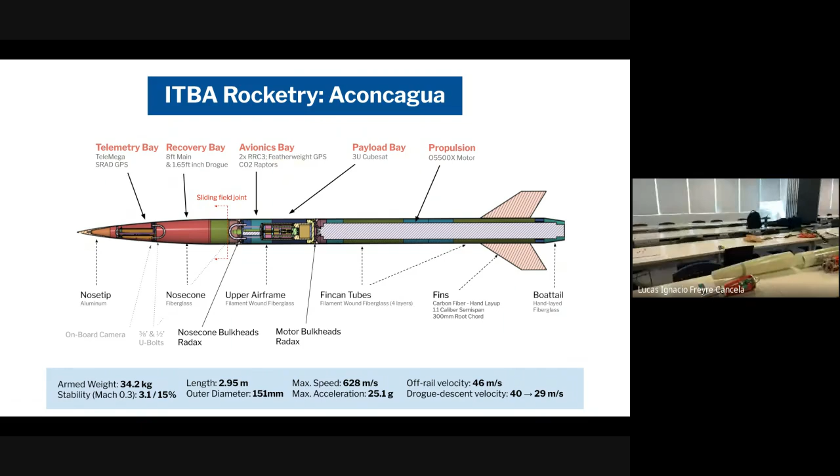We have 2 fin cans that are joined by an internal and an external layer of fiber, glass fiber on the inner side and carbon fiber on the outer side. And then we have the fins and the centering. The fins are still to be cut from this carbon plate we manufactured ourselves and are going to be joined to the fuselage through these aluminum mounting devices. So let's move on with the detailed revision of every subsystem, starting by the forward end. Next slide, please.

So you can see there the general structure. We're going to start off with the nose cone, the nose cone avionics. Great. So first we'll go Ivan and Tomas.

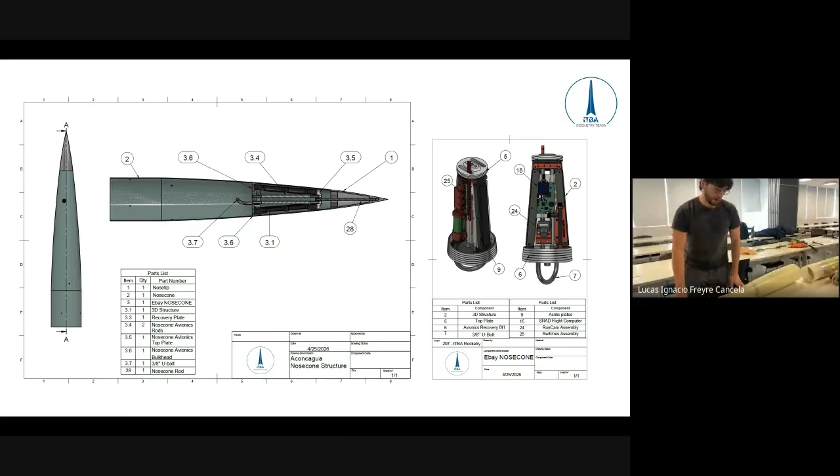So, as Lucas said, this year we were going to have 2 bays. This one is to have telemetry, so we want to receive data out of this one. And talking about the structure, we have a positioning ring where we can bolt this plate to it so that it gets fixed. And talking about the electronics, we have several boards that are in charge of data acquisition and telemetry. COTS board is a Telemega 5th version board.

This one acquires GPS position, altitude, velocity, acceleration, and sends the data with this antenna to our ground station. We also have our own SRAD boards. This one has the same capabilities as a Telemega, but it's not in charge of charges deployment. It's just for data acquisition and telemetry.

And on the other plate, we have a mounted live camera. It's not populated because we are working on it, but you can see the structure. Here should be the FPV camera. Great, and you can see it on the screen in the presentation. On the top right, you can see the assembly out of the CAD files.

Can you hear it properly? Yeah. Great. Can I see more closely the nose tip and the avionics? Yes, of course. Okay, and the hard point. Can you tell me more about the material of the hard point of the parachute, the U-bolt?

Okay, so this is a steel U-bolt. It's a 3/8 inch by 1.5 diameter. The load path in this case doesn't travel through the 3D printed structure, but instead we have kind of a fail-safe mechanism. As tension travels through here, it goes to the two posts of the U-bolt, and then in a first instance, the load is transferred. If you can see inside the nose cone, we have an epoxy joint glue.

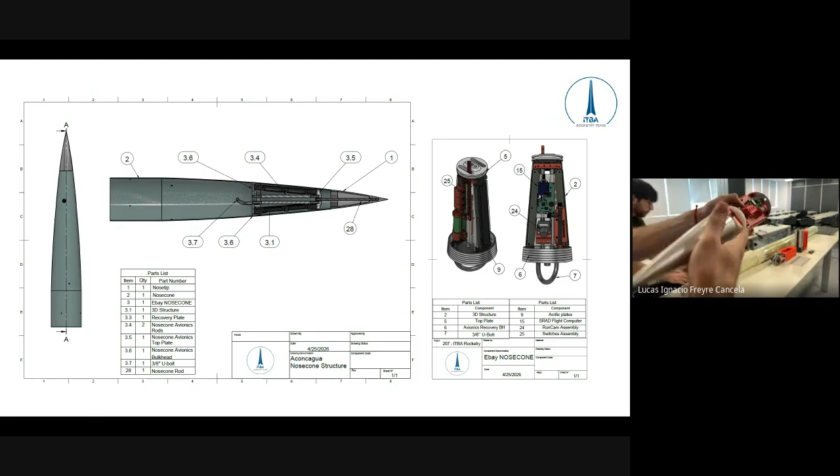Okay, perfect. Oh, and we've got another detail. The nose cone can be unscrewed so that we can recover data through these holes, which will house a USB plug, so we can do a quick data gathering after the flight. Okay, perfect. Great.

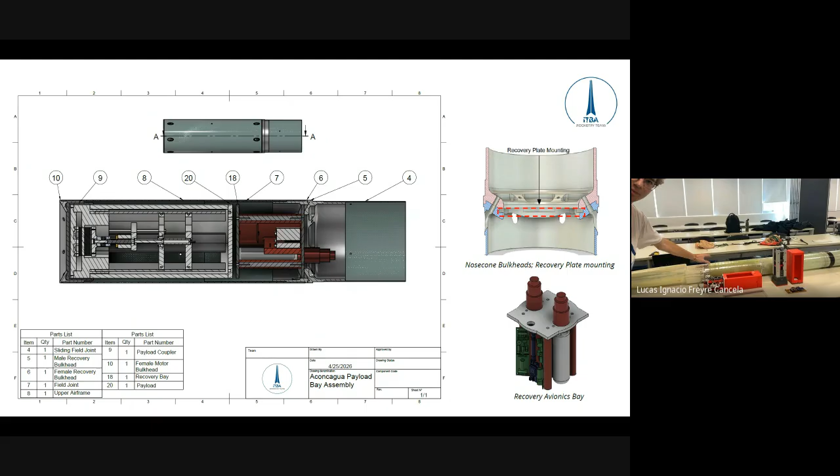So moving aft, here you can see the upper airframe. There it is. So doing a quick presentation of the upper airframe. We have the bulkheads. We have a pair of bulkheads that join the nose cone with the upper airframe. The sliding field joint gets inserted into the nose cone and is fixed during flight through 4 shear pins that are cut at apogee.

And then inside of the upper airframe, we've got the recovery bay and the payload that will be presented now again by Ivan and Tomas, and then by Marco, the payload. So please.

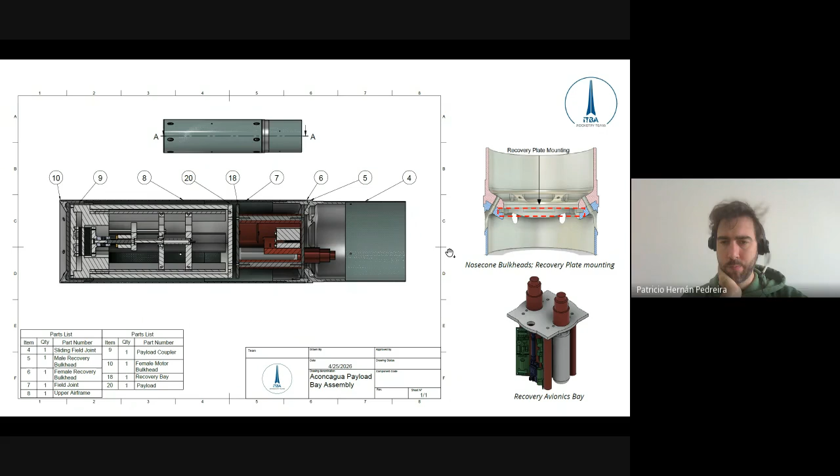I think we lost you guys. There is bad connection. Hi guys, we can see you from the second camera, but we can't hear you. Yeah, I can hear you too. Yeah, let's see if they realize. Hey. Are you able to hear us now? Hello. Okay, we will continue with the audio from this computer, and continue showing the rocket on the phone, if that's okay.

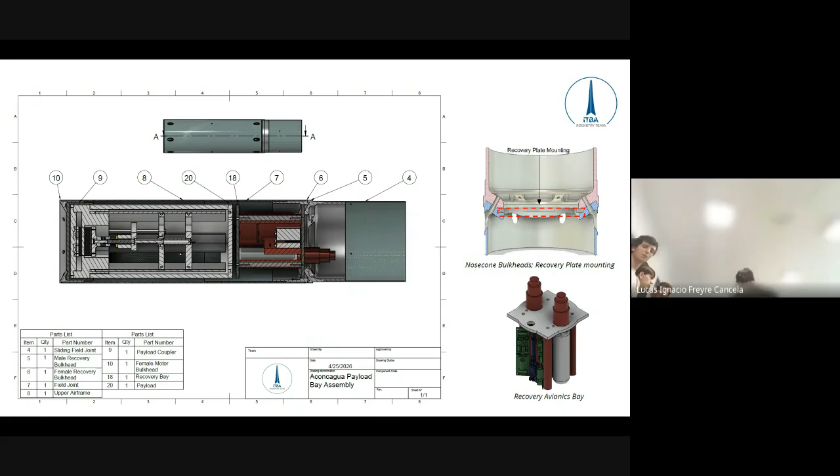So, Ivan and Tomas, can you tell us how the recovery bay is turned on? Okay. So these RRC3 have their own cables, these Molex connectors.

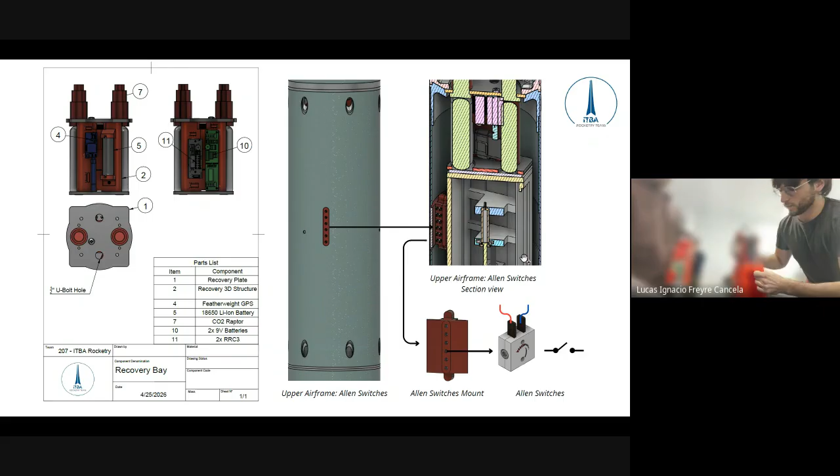So you can see in the image that is showing on the computer, these boards have their own redundant systems, and the connections are through these connectors. These Molex connectors are the female version of it. So we have the male connected to the switches that are downwards, fixed to the fuselage.

Okay, guys, before we continue, can you remove the background filter, because then I can see. Yes. Oh, yeah, that's it. Great.

So yeah, you can see in the right images what Tommy just described, the switches that are glued to the upper airframe and contain the Allen switches, as can be seen where I'm pointing at with the mouse.

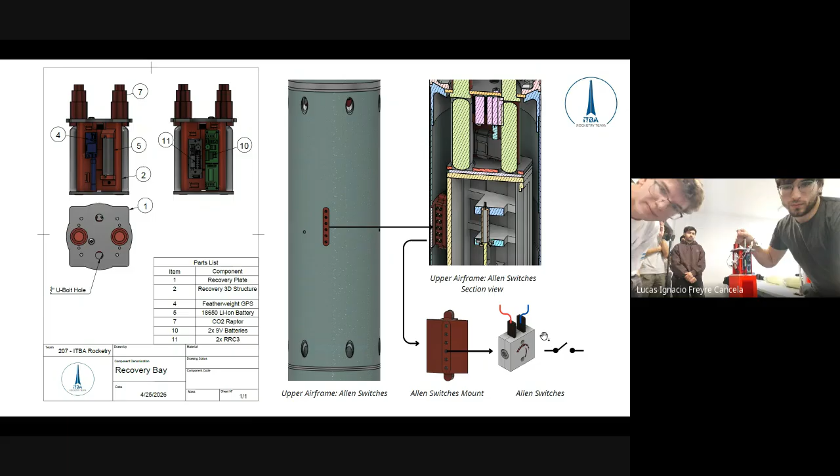Okay. So the procedure will be grabbing the connector that is on the switches, connected to this bay, fix the connection, and attach it to ensure that in all the flight it is not moved. And that's it. Then you can mount the bay. Great.

Yes. Okay, this is the other one. I will proceed to show you the recovery load path for the U-bolt when deployment occurs. So, as you can see, we have this plate right here with a 1/2-inch U-bolt, which we have FEM validated. So this sandwiches between the two bulkheads that you can see. Probably. Yeah. Yep.

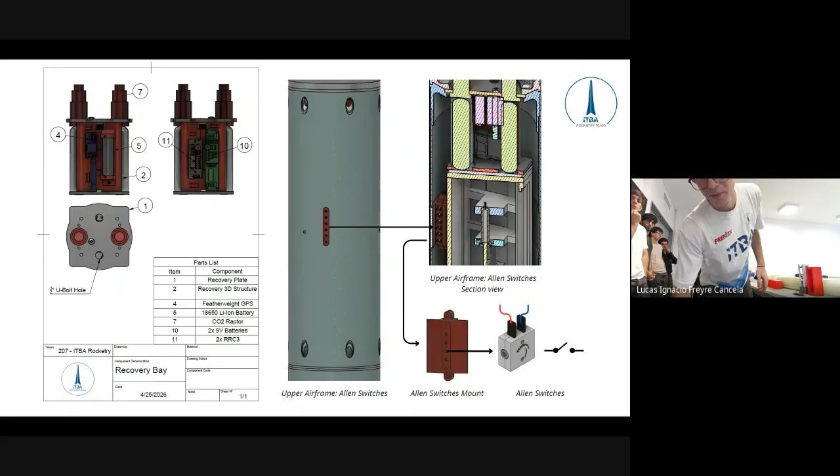So you can see our bulkhead right there. That's 2 halves of the radial joint, and we have a gap for the plate here. I don't know if you can see it because my finger is quite tight. We can disassemble it if you want to see it further, Walter. We have a section view also to show you how the plate is sandwiched. This one on the top right image. Okay, the recovery plate mounting. This one. Okay.

And this is also a section view of the radial joints. So you can see how the bolts can be inserted at an angle. Okay. How many bolts and which size do you choose for this mechanical ensemble? Yeah, we have 6 M6 bolts, and we have FEM validated this joint. Okay.

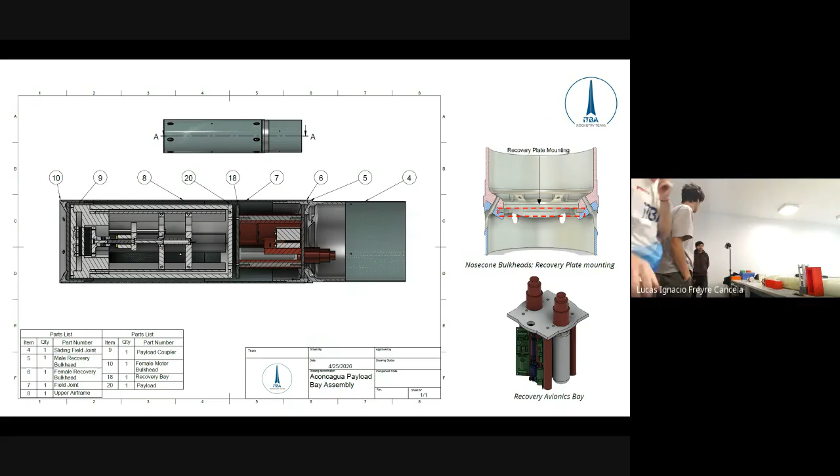Going back to the recovery load transfer with the nose cone. Oh, great. We have already. So let's move on to the line diagram. Now Santiago is going to present you the recovery gear. So I'll explain from the presentation, then I move on to the physical line diagram so we can understand it better. We have two diagrams. First, at flight, that is the first diagram presented.

Then when we detect apogee with the two redundant RRC3 computers, we trigger Raptor CO2 devices and get the decoupling of this system. We have a drogue and main parachute system. The drogue is a 1.65 feet elliptical canopy of 2.2 drag coefficient, which ensures us a 30 meters per second descent rate at the opening of the main parachute.

This drogue parachute is connected through a 10-foot Kevlar shock cord to a quick link, swivel link, and then 3-ring device system. The swivel link prevents us from entangling the shock cords, and the 3-ring device is used to assure further deployment of the main parachute. So once we reach 1,200 feet above ground level, we trigger two redundant line cutters to release the 3-ring device system.

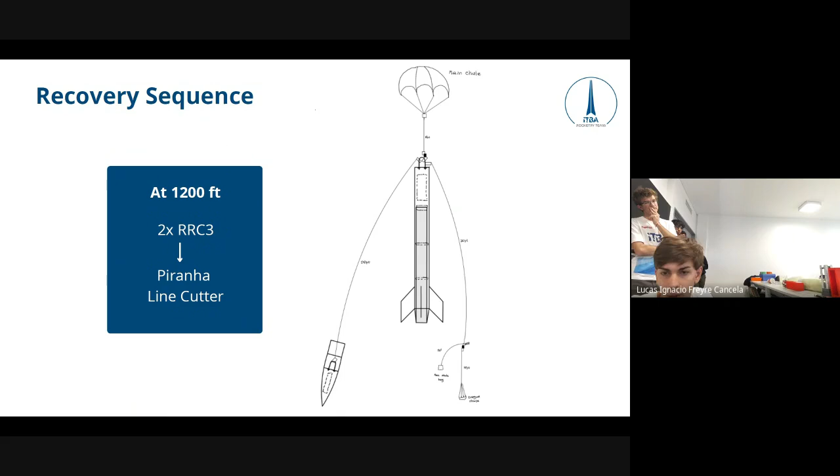This 20-foot length prevents the nose cone from hitting the rocket body's fuselage at main parachute descent. And then on the other side, we have another 20-foot shock cord, which will retain the drogue parachute and the pod and the remaining parts of the recovery sequence. So nothing gets lost at descent. We'll show you a bit of the physical line diagram.

Have you already tried this configuration in a flight, or is it a conceptual design? No, it was used the previous years, and we work very tightly with a business here in Argentina that specializes in recovery, and we came up with this diagram as an improvement of last year's version, but it's very similar. Okay, perfect. It's already been tested. I have a question about this. Could you go back to the previous slide? Yes.

So yeah. During drogue descent, the drogue will be directly above the compartment that has the main. So as the main comes out and it starts to unfurl, how do you prevent it from tangling with the drogue? Yeah, so we have been talking about this with our parachute specialist.

He assures us that when the main parachute inflates, the drogue no longer has enough airflow to stay inflated, so it falls as a separate bag next to the fuselage of the rocket body. And just to prove the concept, we're going to test it. We're going to test the complete recovery sequence via a moving car, a car with almost the velocity of the main descent. We're going to unfold the main when the drogue is open and just check that it doesn't tangle.

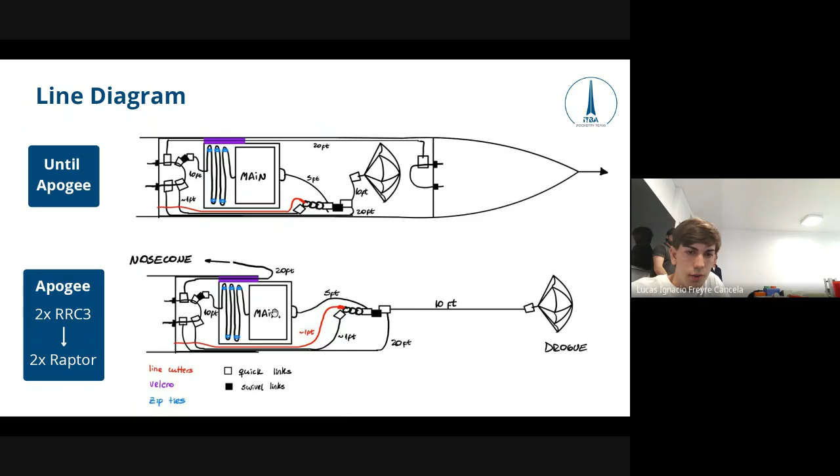Is the main in a bag or is it in a compartment? I can't tell from this diagram. It looks square. How is it prepared? Is it folded, wrapped? What are you doing with it? Yeah, so the main parachute will be kept inside the pod, a semi-cylindrical pod, which will come out when we trigger the line cutters and release the 3-ring system. So the 10-foot shock cord and the main will be kept inside a semi-cylindrical pod, and the drogue parachute will be enveloped inside a small piece of fabric.

But the pod is a bag. Yeah. Sorry, the pod is a bag. And the bag is extracted via the drogue parachute. So when we detonate the line cutter and release the 3-ring, we will cause tension upon that 5-foot line, which extracts the bag and drives the drogue parachute further than the main opening. That's why our partner with IREC, which is the one that manufactures our parachutes, said that we wouldn't have entanglement.

Is the bag connected to the top of the main, or is it only connected through that cord that I see on the right side of the diagram? It looks like it pulls it out. The one that says nose cone, or which line in the diagram? So can you just show me how the cords connect to the bag and how the main, if it connects to the bag, connects? Sometimes when you fly with bags, you attach a line which is inside the bag to the top of the canopy. I don't know if you're doing that. So could you show us the actual materials on the table there and how they'll be packed?

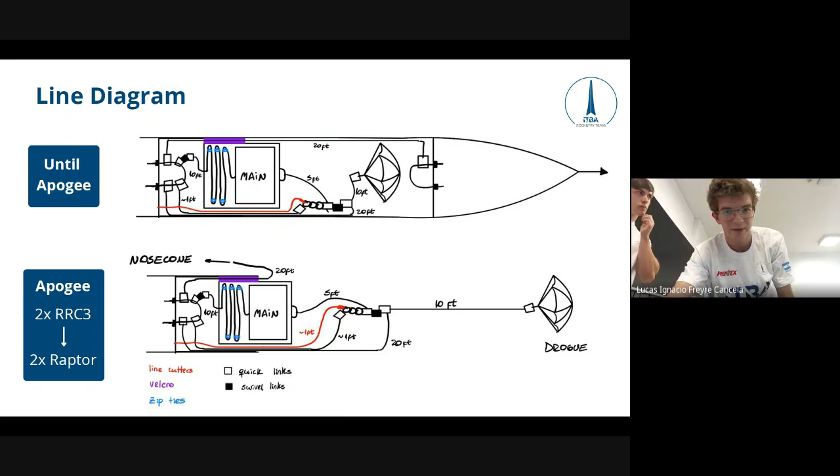Yes, currently we're expecting the main to arrive, but we can tell you that it is going to be joined from the inside. The pod is connected to the top of the parachute through a line. Yes, we are doing that. We just can't show it to you yet because we're waiting on the arrival of the parachute. But if you want, next week we can show it to you. It is going to be connected through an internal cord.

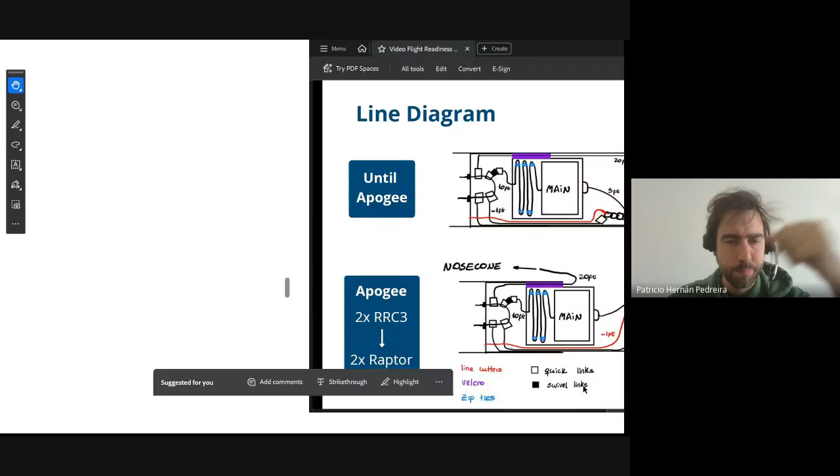Sorry, I think the guys forgot to mention this, but on the table is what we have from, I believe, last year's rocket, because we haven't received the parachutes for this year yet. So on the table is the system from last year, which is, as Lucas explained, very similar to what they are going to use this year. Just that small comment. Okay. Yes, thank you. Could you go to the next slide? Yes.

So in this diagram, where is the bag? The bag has actually already been extracted and is connected through this 20-foot shock cord and its 5-foot shock cord. Okay, so the bag is the small square where the cursor was. I just noticed this image contradicts what I just told you, but it's waiting to be refreshed. We have another version of this drawing we have yet to insert, but the main chute bag would be linked to this end of the parachute.

Okay. So that cord, which you show with the drogue hanging down, will actually be above the main, right? Because the bag is above the main too, right? Yeah, at first, yes. Do you need to update the diagram and send us the final configuration, because we need to review that? Yes. The objective is to prevent you having any issues in the recovery. Yes, of course. As soon as we end the meeting, we'll send it to you.

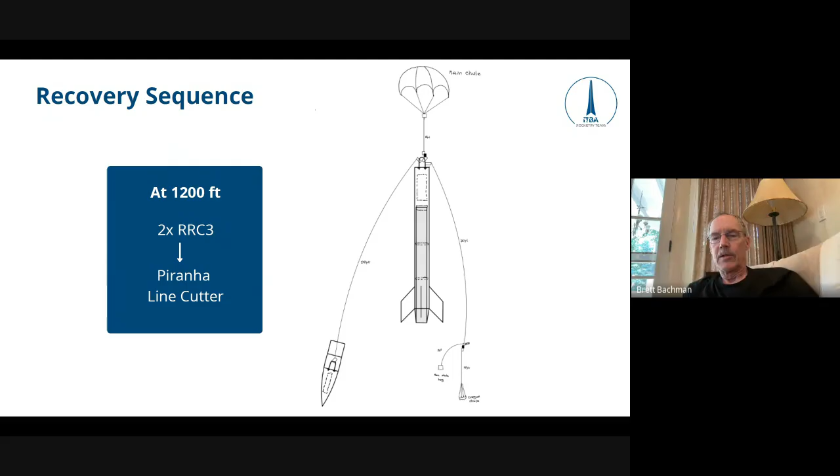The risk sometimes is the main canopy tangles in the components which are above it. So I just want to review very carefully what you propose so that we avoid potentially a partial inflation of the main. All right, perfect. So that's all for now. Thank you. Great. Thank you, Brett.

So now we're going to show you, you want to show the line diagram? We can show it when we have the final design, maybe. When the components arrive, we can show you a video of the finished recovery system. Okay? Yeah, that's fine. If you have it, you can add the recovery system packing sequence. Sorry, you both talked at the same time. I couldn't hear you.

If you have it, you can add the recovery system packing sequence. Oh, you want to see the recovery packing sequence? If you have a document that you can add or send us with the video. Yes, we do. Okay, perfect. We have arranged it with our manufacturer. We already have it, so we'll be sending it to you.

Okay. So do you have the actual drogue parachute you plan to fly with, or are you waiting for the supplier? We're waiting for it to arrive from the supplier, but it's already almost done with the manufacturer. It should arrive this week. Okay. Do you have the actual shock cord you plan to fly with, or are you waiting for that? We have everything part of the recovery gear. We have the shock cords, the swivel links, the quick links. We're just missing the parachutes and the 3-ring that is supplied by this business Aero Rigging in Argentina.

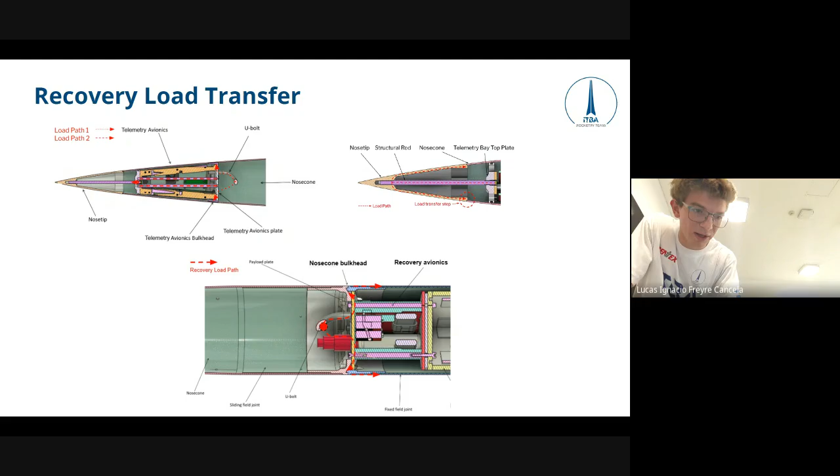I don't know, Walter, what your opinion is on this. Yeah, I usually make the same configuration that you use, but I recommend that you add a swivel in that hard point. Another swivel? Or just move it, remove the quick link and connect the swivel directly to the U-bolt, just to be clear. Yeah, something like that. Okay, well noted. Thank you. So how will you prepare the shock cords before packing? What do you do with it?

It depends, but for example, the shock cord that connects to the main parachute will be packed with shear zip ties, as I have mentioned previously, to receive some of the energy when the main parachute inflates. And then the other shock cords will just be packed with small elastic bands to get a more compact design. Yeah, so normally I recommend you Z-fold, maybe 6 inches back and forth, 6 loops, tape on either end, something like that to organize the cords.

You're probably going to do that, but many teams don't think about doing that, and it causes tangles from time to time. Okay, thank you for the recommendation. Yeah, great. Just add these details in the packing sequence, just to confirm that you have the right procedures. Okay, great. We'll also add it into the integration document.

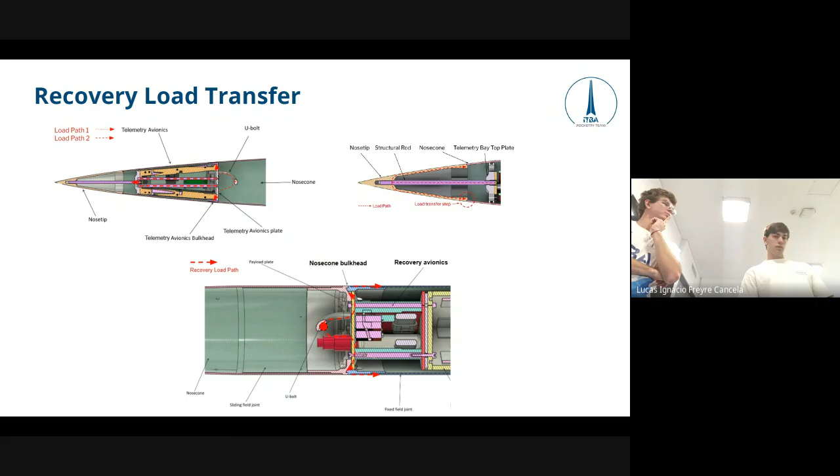Okay, perfect. And just to confirm, you use CO2 for deployment, right? Yeah, we are using Raptor CO2 deployment mechanisms. Okay, and what is the size of the cartridge? So we are currently undergoing ground testing for the pop tests, but we have calculated that we will need around 35 grams of CO2, and then we have another cartridge of 45 grams of CO2 that deploys half a second later to ensure deployment in case of a dud or any problem with the canister.

What kind of shear pins? How many? We are using 4 nylon 4-40 shear pins. How many in total? 4. 4 for each section? We only have one deployment section, so that's right. Okay, sorry, that's 4. Do you have vent holes in the recovery compartment? Yes, we do have vent holes in the recovery compartment. How many? How big? We have 4 4-millimeter holes, I believe.

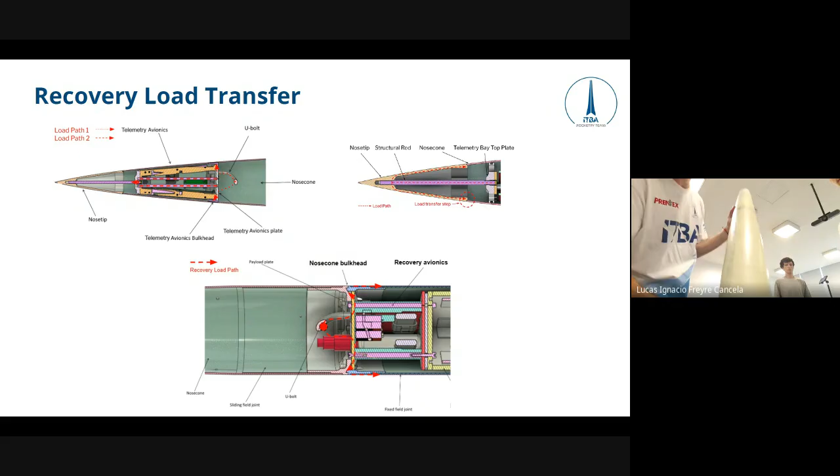Okay. And are the vent holes already in the airframe? Can you show us the holes in the airframe? Oh no. We've already made the shear pin holes, but we haven't made the pressure relief holes, but they are very similar. So we can show you the holes for the shear pins, and we can tell you that they're going to be exactly like this. But you don't already have the vent holes in the airframe. No, we're doing them this week also.

Okay. So can you explain exactly where you plan to put the vent holes? Can you show us on the airframe where they will be? Okay. So firstly, we need vent holes in the upper portion to equalize the pressure for the avionics bay telemetry, which we are looking into to see how many we need in the upper part, but that is sealed by the bulkhead from the recovery bay. So we have done all our tests with this assembled.

And then on the lower part, we were planning to add 4 holes to the recovery bay, equally apart. That would be every 90 degrees, a 4-millimeter hole toward the upper portion of the recovery bay. Yeah, it would be almost in this section of the airframe. You can use the cell phone camera to show it. Yeah, sorry. It's on this portion, near the bulkhead. You can see the bulkhead because it's kind of translucent here. So we would make them near the top, 90 degrees apart, so 4 holes. Okay.

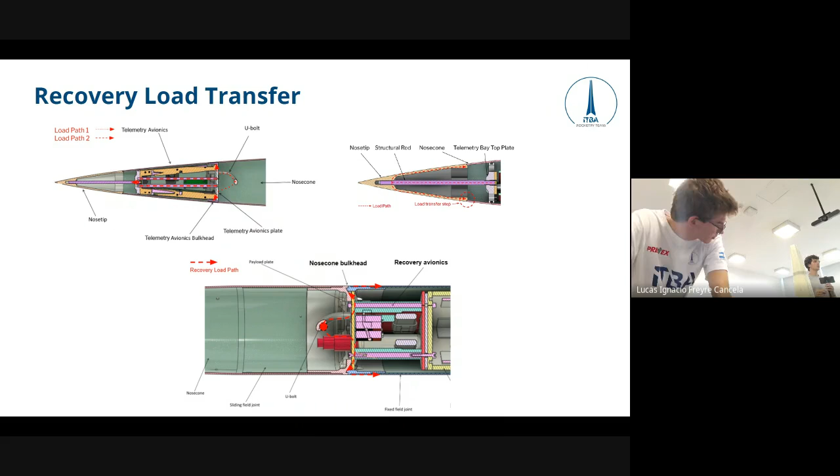What's the maximum velocity for your flight? We reach approximately Mach 1.8. Yeah, that's approximately 620 meters per second of max speed. So the vent holes for the avionics will be towards the front of the nose cone, correct? No, but not the mission critical avionics, right?

So we have talked that all of the avionics on the upper part here are SRAD avionics that are not in charge of the deployment of charges. All of the deployment is achieved by this avionics bay, which is right here in this portion of the airframe. So how far down from the shoulder of the nose cone will that compartment be approximately? The one that deploys the charges.

Yeah. So what I'm trying to ask, the vent holes for your avionics bay, it's best to keep them well out of the disturbance in airflow that comes when you go transonic and supersonic. So you want to be below the nose cone shoulders so you get out of the way of those shock waves. So I just wondered roughly where the vent holes for your avionics bay will be compared to the shoulder of the nose cone.

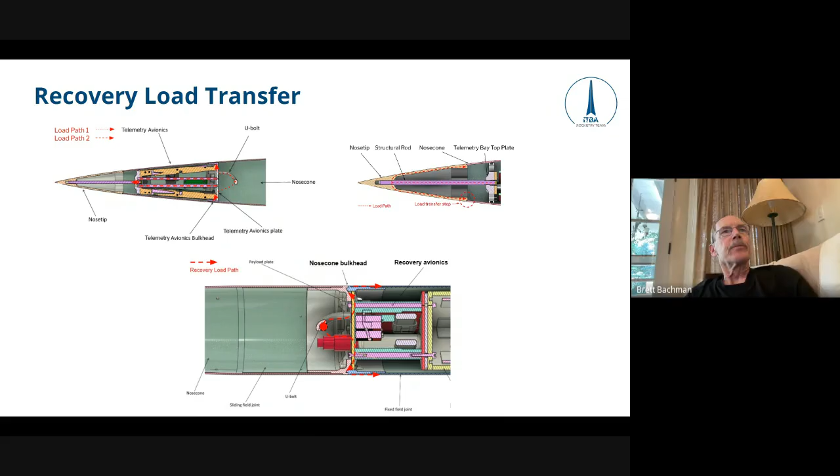Okay, yeah, so if I'm showing you this right here. Sorry, the phone. Wait, I'll go like that, whether you can understand this better. This is our nose cone, right? Here we have parachutes, and then we have the mission critical avionics housed in this region right here. So the vent holes will go right here, 90 degrees apart. Yeah. So, as low as you can, because you're kind of close to the nose cone shoulder. Okay. All right. Great. Thank you.

Great. So moving on to the payload. Marco will show you now how this works. Is that okay? Okay, so basically we're going to make a payload. It's a scientific experiment. It's a 3U CubeSat and 2 kilograms, so we can meet the requirements. We designed an infusion pump, which is a medical device used for precise delivery of flow. And it's pretty simple actually. It's mostly a linear actuator with a lead screw that pushes the syringe and then generates flow.

And what we're going to do for this experiment is measure the flow that the infusion pump creates between launch and apogee, as there have been some papers written about how not only vibrations, but high accelerations and even changes in external pressure can influence and affect the delivery of flow produced by these systems, such as creating boluses, which are sudden increments in flow rate, or air pockets, which can strongly affect the delivery of these systems.

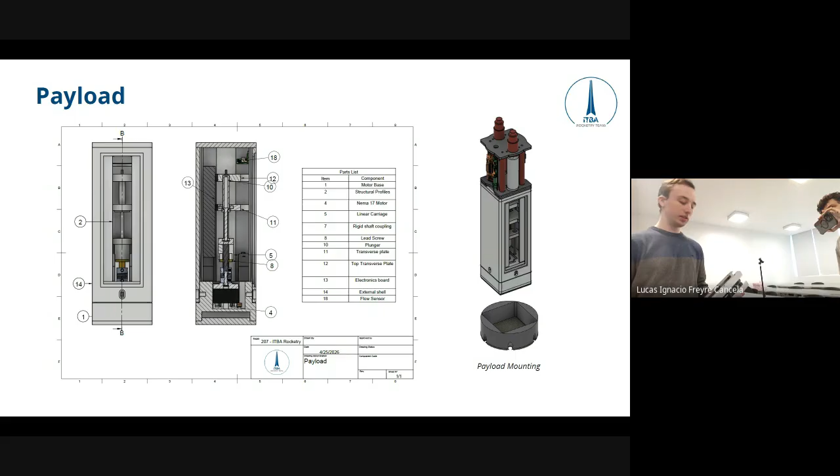Activation is given through an accelerometer that detects launch from a high acceleration and then starts the experiment. Okay, and that accelerometer is powered by a battery, right? Yes. And that battery, at which time of the assembly process is it turned on or connected with the sensors? It's turned on by the switches on the external side of the rocket. A separate one that is only for payload activation. Okay. And that payload is attached to the rocket in all the launch and recovery steps? Yep.

And what is the method that you use to attach all the system to the rocket? Okay, Felipe. So as you can see here, we have this plate that is captured by the two radial joints approximately at this height in the rocket. Then we have the avionics plate. What you can't see here is that we have 4 aluminum 6061-T6 rods that join these two plates. So this is non-structural, that's 3D printed.

And then we have another aluminum plate that is directly bolted to the top of the payload bay. The payload is housed here. And then we have a support on the bottom that acts as a rest that prevents the payload from traveling in tension. You can see the rest here in the right image of the slide. You can see the payload attached to the recovery bay, and then the payload mounting on the bottom of the payload.

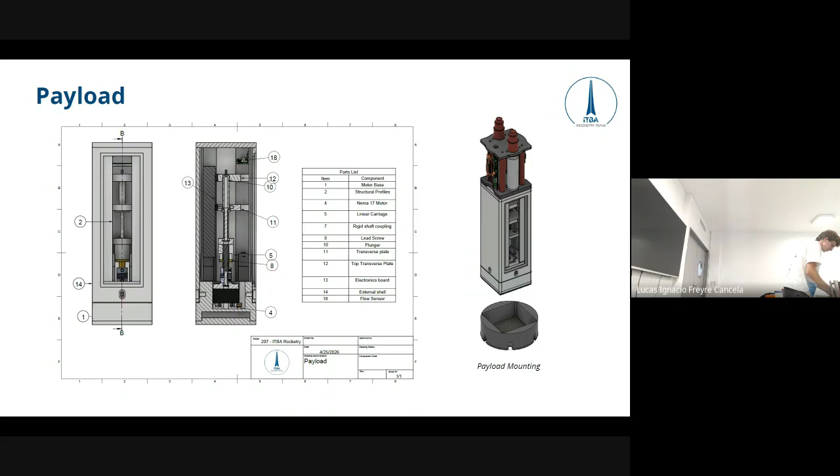Yeah. So my essential question is, is there a screw that goes through the fiberglass and which then connects to that mounting, or is it just to the aluminum of the radial ring? Just to the aluminum of the radial joint. We have the orifice here, and it stops at the radial joint. So we can separate this because we haven't glued it yet. We want to show it to you. So let me ask the rest of my question.

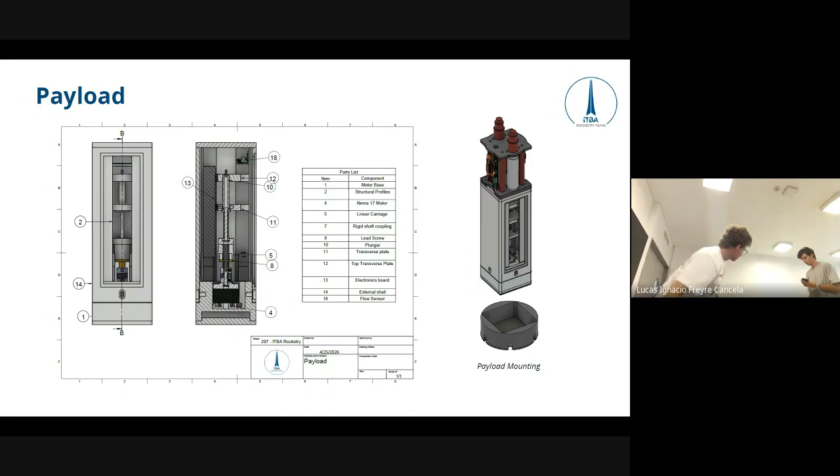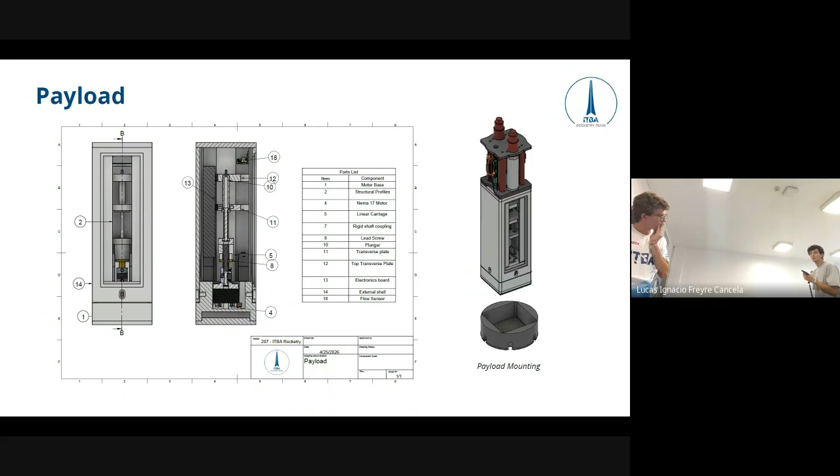So let's say that you have an unplanned separation during boost, and the rocket comes apart. This is going to flop down at Mach 1.8. Is it possible for the weight of the payload to cause the glue joint to the radial connector to fail and this comes out? No, because you mean to the nose cone bulkhead, to the top bulkhead, or to the bottom bulkhead? Either one. What will happen if you have a failure at Mach 1.8? Will it be just a glue joint, or do you have any screws? I think I didn't understand the question. You're asking if we have any additional screws that go through the fiberglass into the radial joint, or if it's just glue joints for the airframe, not the payload. Well, for the latter question, I think you said it's just the glue that holds this in, right? Yeah.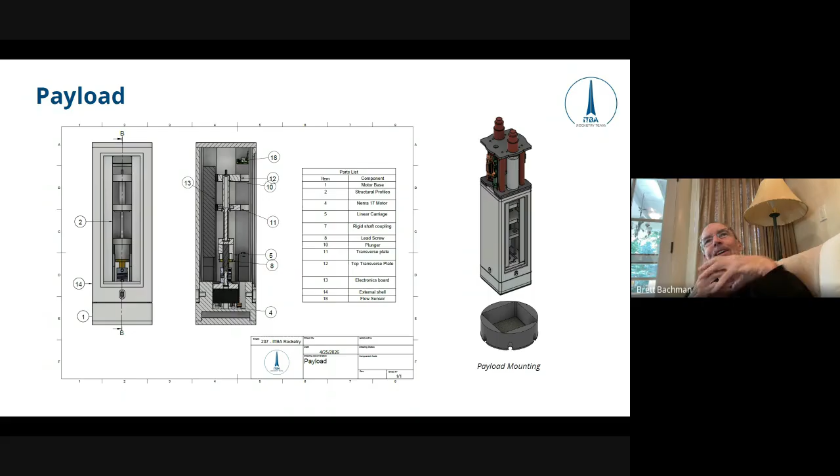Okay, so what I'm asking is if for some reason the apogee joint separates or something happens, is it possible that the entire force of the payload could be pressing against what looks like a 10 centimeter glue joint that could come out? I'm just trying to understand. Oh, okay. No, we dimensioned our glue joints, and every one of them has a safety factor over 6. It's a really big area, and we did lap shear tests through ASTM mechanical testing, and we dimensioned every joint to have a safety factor of at least 6, even at the worst case scenario. So we rely heavily on our testing. We did many samples, and that's what gives us confidence in our glue joints. So 2 kilograms is a really small force for what our joints can withstand.

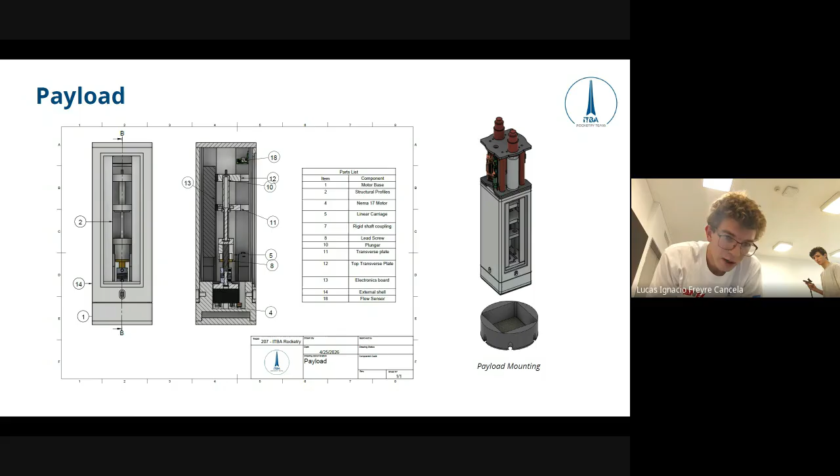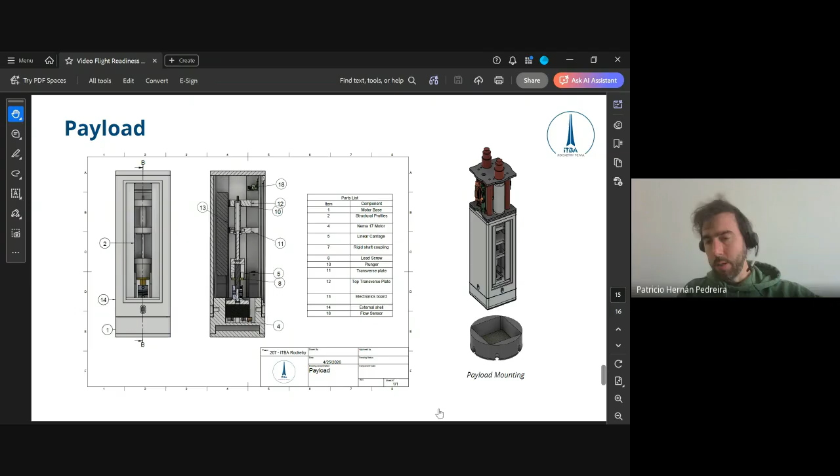Have you done a destructive test on a sample? Have you ever actually tried it? We did ASTM D5868 testing. We did over 70 destructive tests with a universal testing machine, and yes, we obtained statistical results. So in pounds, how strong is it, do you think? Like 4,000 pounds, 8,000? Let us look for a calculator. Let us give it to you in Newtons. Okay. That was my only question. I can tell you that the joint can withstand up to 11 megapascals. How many pounds is that? I just did the math. So the joints can withstand 1,600 pounds per square inch. And the resulting stress, as Lucas mentioned, is 1/6 of that in the rocket.

Great, thank you, Patricio. So, for example, if the shock cord was pulling with a main parachute or something, your shock cord, I think you said, was like 3,000 pound strength. So would the shock cord break first, or would the radix joint glue break first?

Which would break first? The shock cord will break first, because the resistance Patricio mentioned is per glued square inch, and we have far more than a square inch of glue joint. So the shock cord would break before the radix joint. Okay, that's right. I understand. Thank you. No problem.

Thank you, Christian, Brett. Can we see inside the body tubes? You can separate the body tubes, and we can see the inside. Yes, of course. Do you want to see the radix joints? Yeah, show them all. Open everything up. Show each one. Great. We're very excited about these joints.

They were machined in a 5-axis CNC machine, and they are weight optimized and validated through FEM analysis in ANSYS. We also made a loads program so we could estimate the forces on each bulkhead, and that's the input we used to validate it through FEM. We followed ESRA links and arrived at a paper to calculate the forces on all of the rockets.

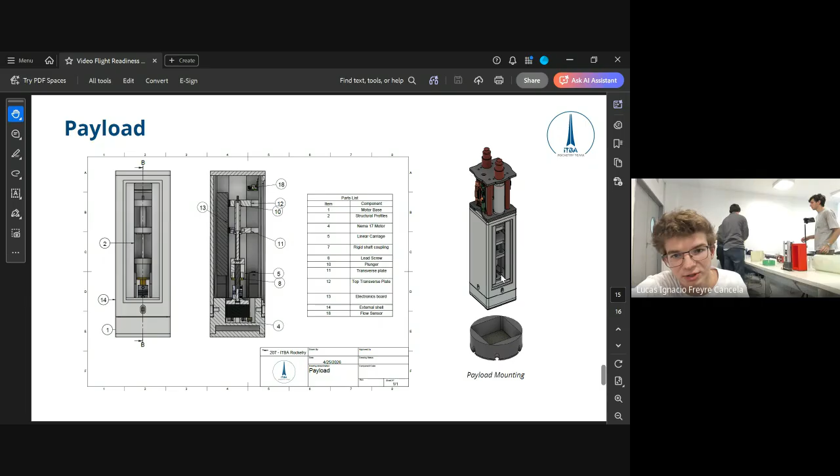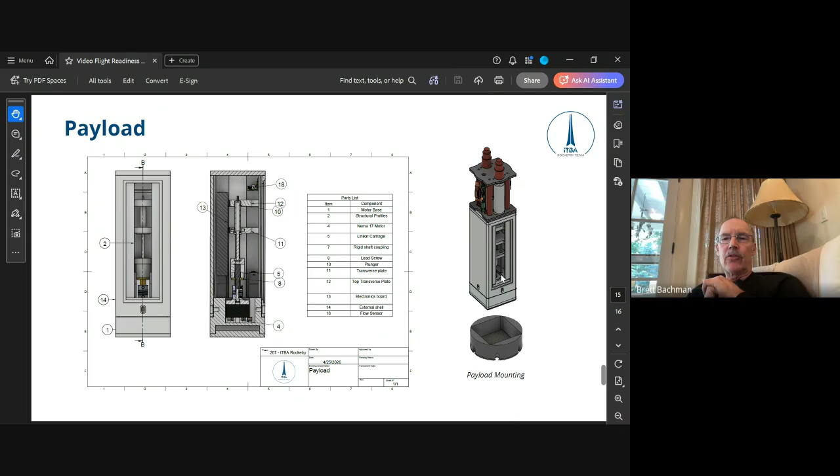So we considered not just compressive and inertial forces, but also bending and wind shear. So Felipe is now showing you the internal part of the rocket. Okay, so can you hear me properly? Yeah. Okay, so our radix joints have not been glued yet. Could you guys stop the presentation and allow us to have this picture be bigger? Yeah. Much better. Thank you.

So this is our bottom radix joint. It's also the motor bulkhead. As you can see, we can separate it for you if you want. This has 3 spokes and the motor receptacle here, and a 3/8 bolt that goes to the top of the motor as per manufacturer specifications. And this goes like this in the airframe, right?

This is a joint that holds the fin can, the fin can bay, and the upper part is the upper part of the payload bay, right? So when we separate it via these 6 Allen head screws, we can separate the two parts of the rocket. And then my partners here will bring up the upper.

I have a question about the bottom of this. Could you turn it over, please? Yep. Have you actually inserted one of your real motors into this airframe to be sure that the forward closure will go inside that little cup? Okay, so we do not have this possibility as we are in Argentina and we are not able to ship motors here due to laws and regulations.

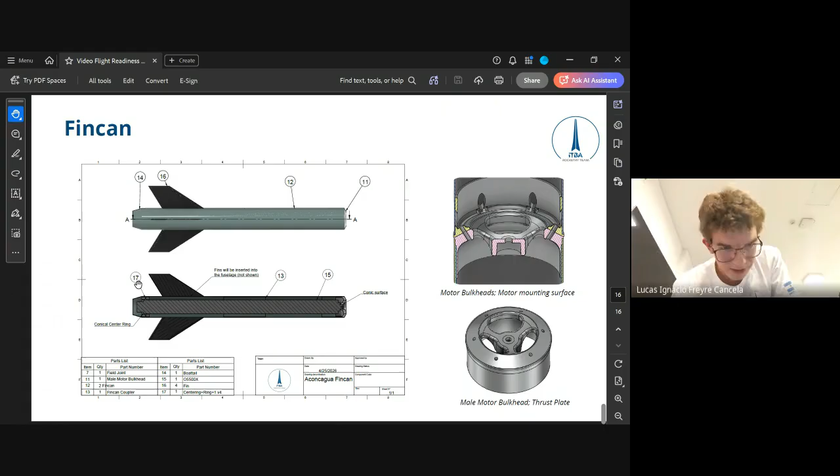This is the conical centering, and what Pipe was just saying is that we can adjust where we glue it, whether more to the forward end or to the aft end. So there we can make some field adjustments. Also, the centering is conical, so it can tolerate differences between nominal dimensions and deviations from it. So the cone.

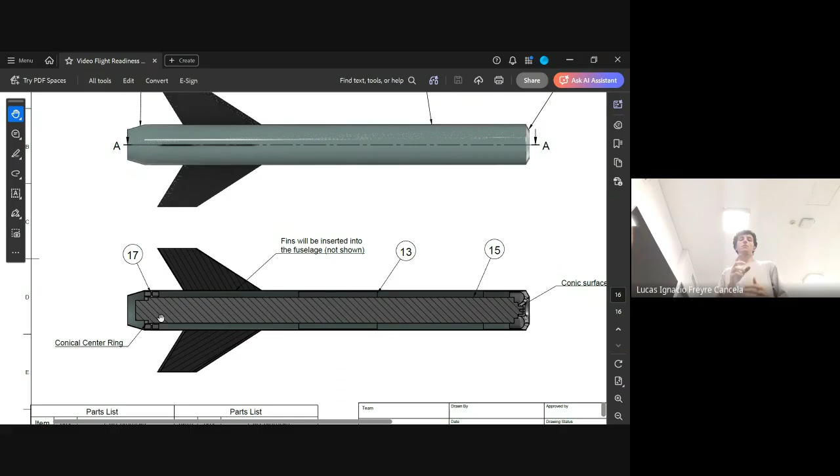So is there any thrust transfer for this? Or is all of the thrust transferred at the forward closure? No, so the idea is the following, right? We get the motor physically when we are in the US. We insert it into the thrust plate that has that conical part, and we insert it as far as it will go. It bottoms out with the thrust plate, and then we slide from the top of the motor the tapered centering ring as far as it goes, right? Because the motor has a ledge on the bottom. We insert as far as it goes, and then we glue it at that height.

So the motor is now transferring thrust through the thrust plate at the top of the rocket, and also through the taper of the centering ring. Despite this, we have made all of our calculations taking the worst case scenario in which all of the thrust is transferred through the thrust plate.

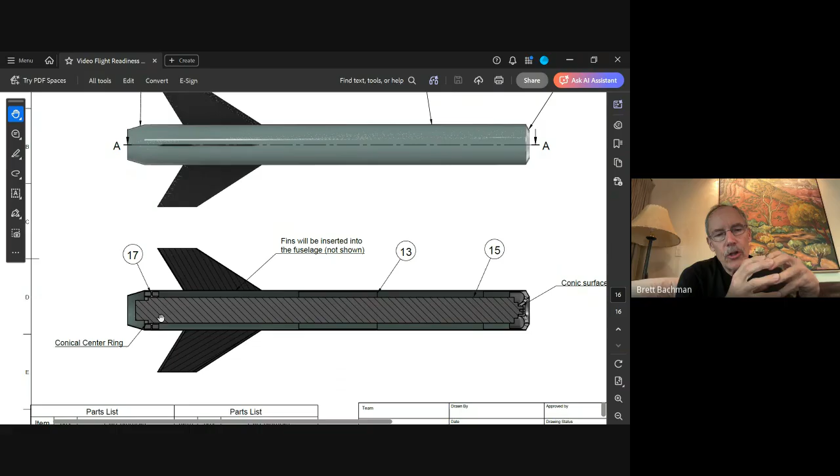So let me clarify my understanding of what you just said. The bottom flange of the O5500 case is transferring thrust to an aluminum part at the base of the rocket? Yeah. Okay. And that part, is the thrust then transferred through a glue joint, or does that thrust plate rest against the airframe tube? No, it's transferred through a glue joint and two screws.

So how big is the glue joint? The glue joint is, I have the measurements in millimeters, approximately 2.5 inches tall by the full diameter that is 6 inches. I don't know how much the area is in inches, but we can make the calculations for you. Yeah, okay. 2.5.

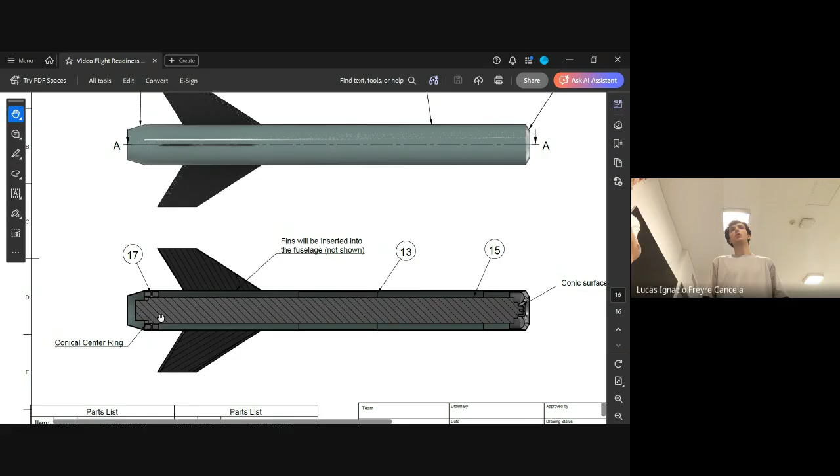So it's interesting, Walter. Normally I see thrust plates with a mechanical transfer of thrust to the airframe. I've never actually seen a thrust plate with a glue joint, especially in an O motor. Yeah, it gets hot too. So this area heats up. If it's better for you guys, we have no restrictions that wouldn't allow us to put screws at that part of the motor. If you have the possibility to add screws, I recommend that you add them.

Or put a flange and have the thrust plate directly transferred to the airframe and leave a little space at the top, so that instead of adjusting the bottom, you have the ability to move the motor against everything, because you don't need that little cup at the top. Okay, we will look into that and make a more reliable system. Yeah, so just my advice.

The top motor retention with your radial joint, the tighter you make the tolerances and the less slack you have means if the motor is not quite made to spec, that is, if it doesn't quite match the dimensions that you're given, what you typically have to do is put a small spacer ring at the bottom around the motor so that the thrust is transferred to what you have at the back end, right?

You don't want to be doing thrust transfer on an O5500 through the forward closure. It's glued and it's a high failure point. So my advice is don't transfer thrust for this motor through the forward closure. Always in the back. Yeah, me too. We will attempt to make more of the load go through the back centering ring rather than all through the forward closure. I would do 100% of the thrust in the back and 0 in the front.

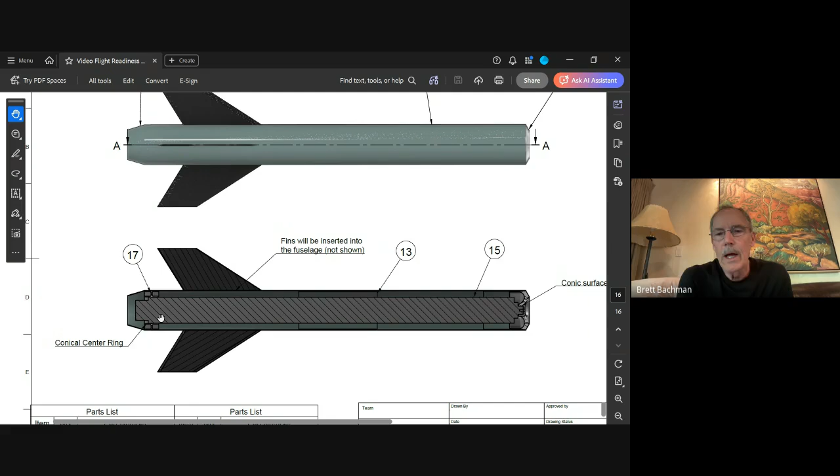So I'm worried about the glue failing in the forward closure for the O5500. Okay. So inside the motor. Okay, yeah, perfect. Yeah, the most likely failure you will have on that motor, it'll CATO by blowing the forward closure out. Okay, perfect. We will look into that then. Great. So I always want the forward closure with a little tension through the screw that's holding the motor in, but not thrust transfer on that metal closure.

Okay, we're looking into that. Okay, yeah, we can do that. I just think it's going to be safer and better for you. Okay, yeah, we can absolutely do that. Thank you for the advice. We didn't know that it was a common failure of the O5500.

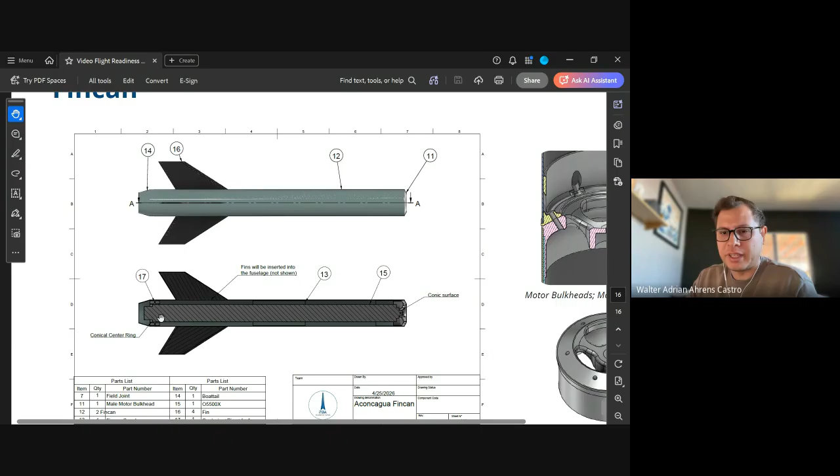Okay, and other question about the motor retainer. Do you use the same part or the lower centering ring to retain the motor in place? We use the centering ring, yeah, to fix the motor in place, that's what the tapered surface is for, and that's what allows us to transfer loads from the motor to the airframe. It serves both functions.

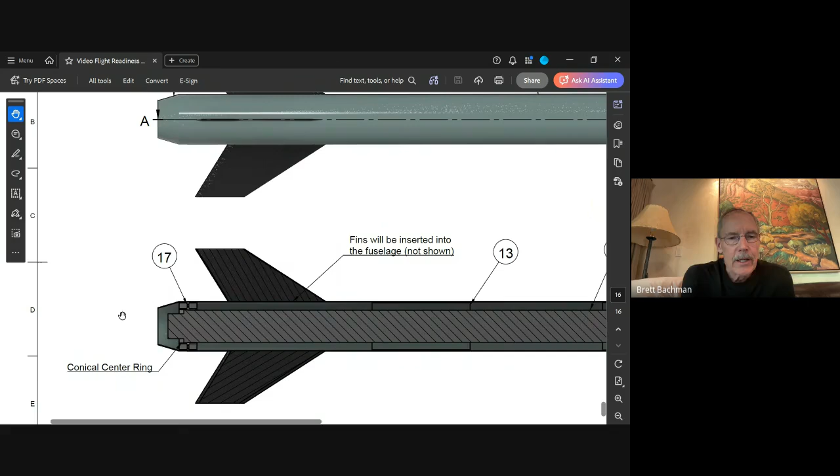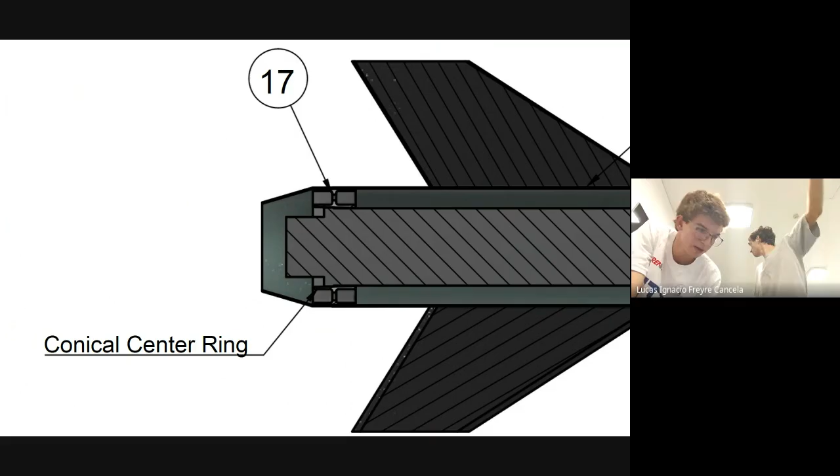So this is an expansion of the centering ring. Okay, so that's the centering ring, which currently you plan to glue in. Yeah. Per your recommendation, we will consider joining it with a bolt to both the fin can and to the boat tail. If it was me, you've got this nice part. I would have that aluminum part have a small flange on it that goes to the diameter of the OD of your airframe. That way, the flange presses against the airframe, and you don't have to worry about failures of screws or glue.

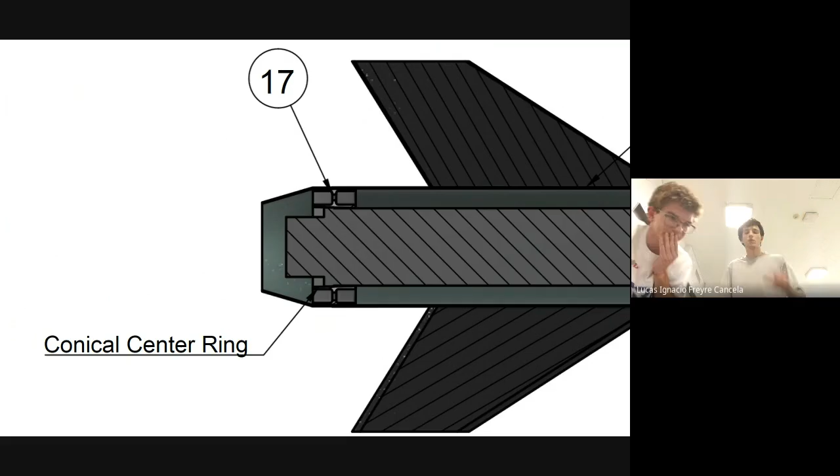Okay, yeah. I got you. That's a great idea. We will look into manufacturing that. Yeah, that's a classic design for a thrust plate, where you have physical transfer to the airframe. Okay, yeah, perfect. And we can machine spacers to take with us when we go to the US to adjust that final measurement.

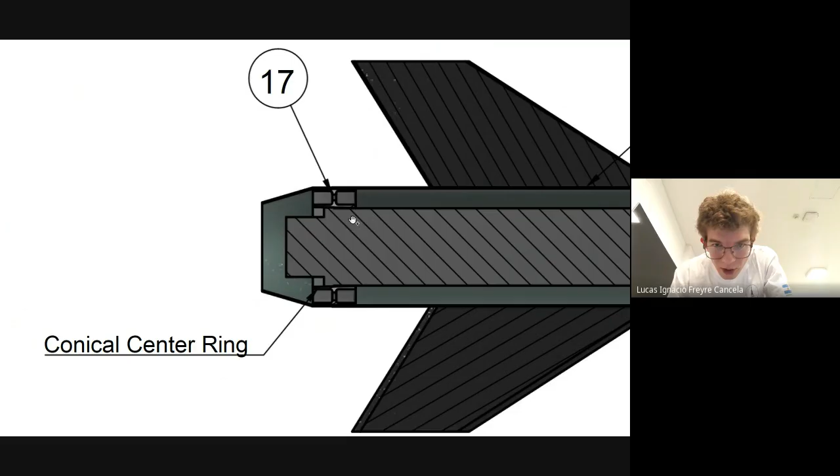Okay, you can tell me more about the boat tail, the material, and this is the final position of the nozzle of the rocket motor. Okay. The nozzle is longer than that. The nozzle is really long. Yeah. So all the measurements of the motor were taken from the drawing that Aerotech sent us. Okay, well, that's not an accurate picture of the nozzle. I guarantee you it does not look like that. It's much longer. Okay, we have some remaining space in case this is longer. So we will see it more in detail.

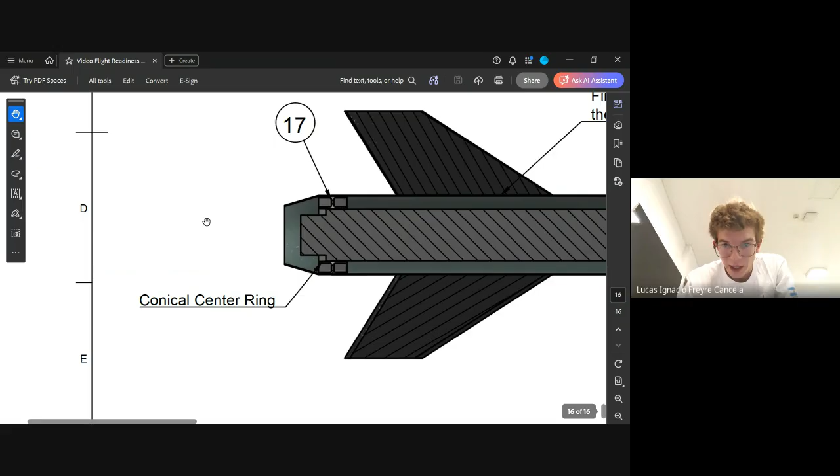The nozzle is like this long. Oh, sorry, I can see you. So maybe 4 or 5 inches. Yeah, it's like 5 inches long. It's this big. Okay. Okay, great. So we'll review this, but the measurements were all taken from the drawing. But we'll check this. So if it's longer, we have a mold already made, and we can manufacture the boat tail again in a longer dimension if needed.

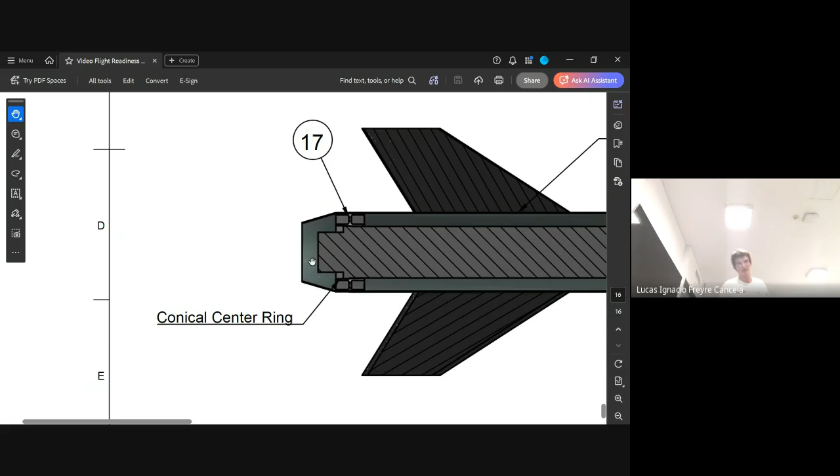If the nozzle exceeds the limit of the boat tail, we have some plans, some drawings that we can slightly change so that the boat tail matches the dimension of the nozzle. What is the material again? It's fiberglass. It's fiberglass. Yes. Felipe is showing you the boat tail on the other camera. What's the clearance between the fiberglass and the nozzle?

So the part you're holding doesn't match the drawing I see on the presentation. It's much longer. No, actually, you mean the boat tail is longer? That's correct. The boat tail that I see in your hand seems longer than what you show in the drawing. Yeah, it seems longer because the cylindrical part of the boat tail is attached to the center ring. So in the drawing, maybe you're just seeing the conical shape, but here it also has a cylindrical surface. That's why it might seem longer.

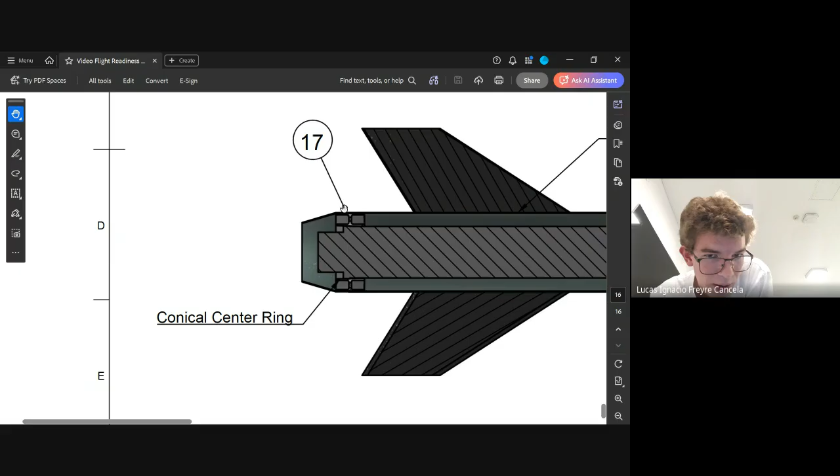So where does the nozzle end in this boat tail? Is it recessed, or does it come out through the hole? No, it's recessed so that the boat tail can take the impact at landing. I don't recommend you do that, not with that powerful a motor. Let me finish for a second, then Walter, maybe you can jump in. I might go flush, but I certainly would not recess this nozzle in a boat tail for this rocket.

Why? Just to understand the concept, why wouldn't you recess it? I guess it goes counter to my instincts and experience flying big rockets. Normally I'm very careful about recessing motors inside of airframe tubes. I only do it on smaller motors. I don't know the engineering, so I can only tell you my instincts. I can't tell you why, it just worries me. Is it because the boat tail might burn? So I have another team.

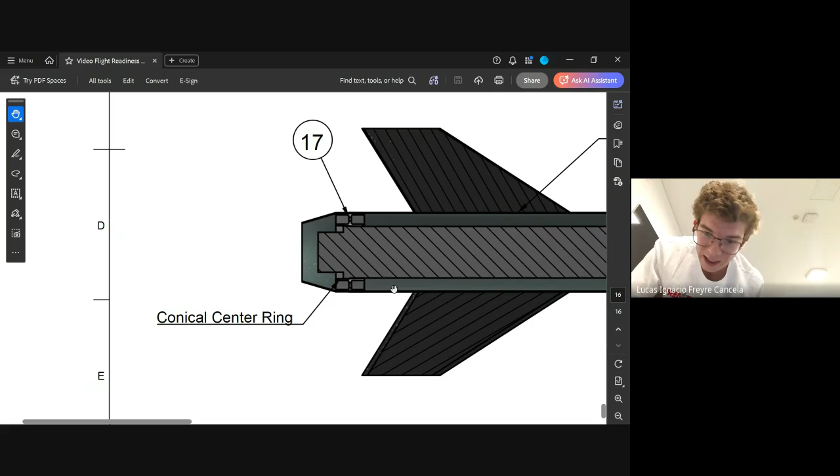Yeah, we have a plan regarding this problem. We have Nomex and Kevlar material here at the university. It's a material we work with from our protection supplier, meant to withstand high temperatures and flames for about 20 seconds, which is more than what the motor burns for. That's why we think it wouldn't burn. But if you think it would be a problem, we will consider changing it and putting the nozzle on the outer side of the boat tail. But may I ask if it isn't a bigger problem for the nozzle to impact the ground rather than having the boat tail with some burns?

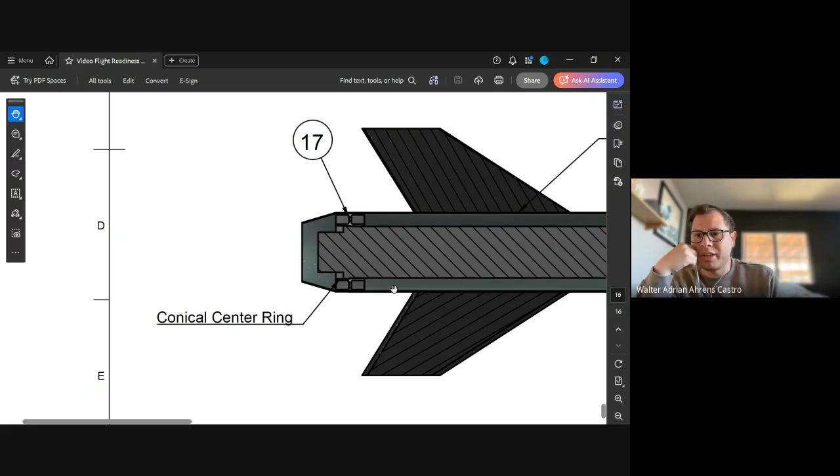I've never worried about the nozzle hitting the ground. For me, this is a one-time use motor. Is there any issue with the nozzle for your rocket to pass in the competition? Yeah, because if you break the rocket airframe, you lose points. Okay, but the motor doesn't count as a piece that can be destroyed, so if we break a part of the nozzle, it doesn't deduct points.

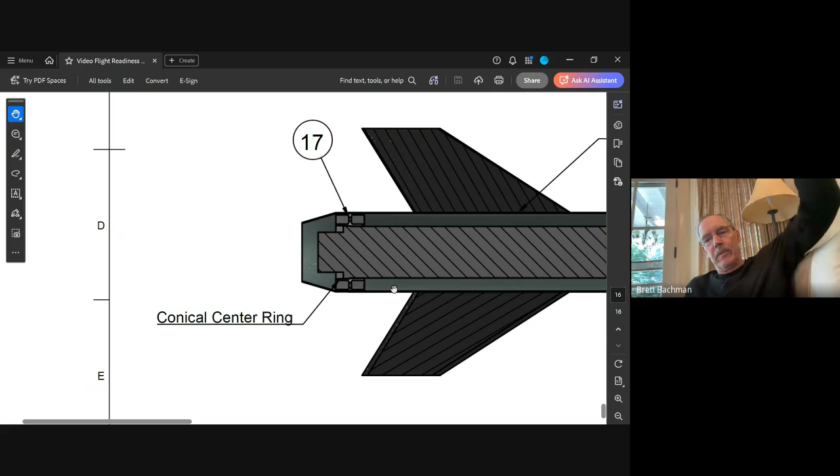How heavy is your rocket, this part on descent? On descent, 22 kilograms. That's 40, 45 pounds, something in that realm. So it's 40 pounds coming in at 20 feet a second. Guys, the nozzle on this motor is really strong. Also, your recovery system will keep the airframe completely vertical. Unless there's very high wind, you're going to be coming straight down into a sandy, limestoney surface, not rocks, at 20 feet a second. I can't imagine extensive damage to a nozzle under those conditions, particularly this motor's nozzle.

Okay, great to have that out of the question. So we'll consider changing that and make the adjustments after the meeting. Yeah, the biggest risk is if you have high winds, you're going to clip one of your fin tips and break a fin. That's more likely than your nozzle breaking, in my opinion. Yeah.

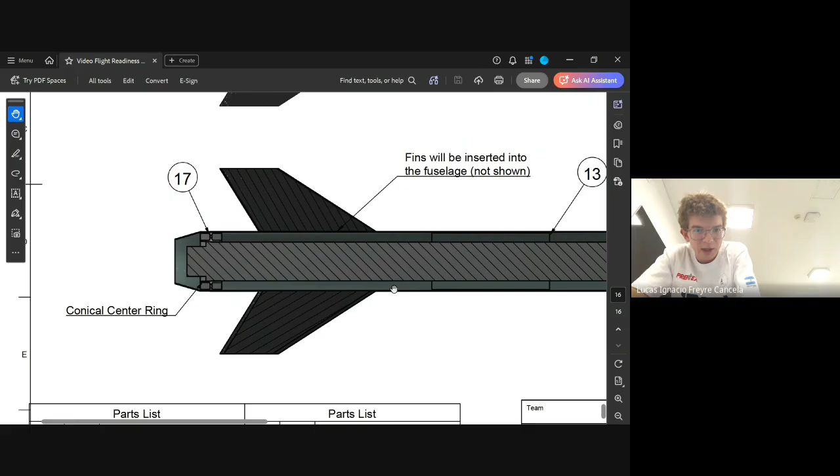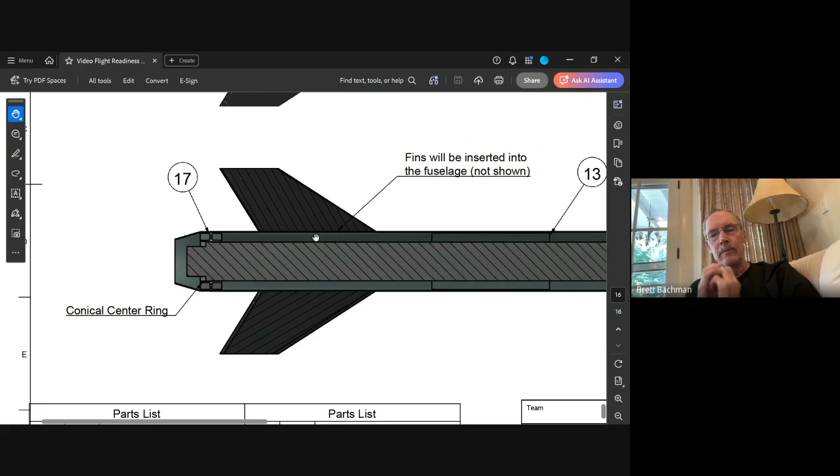So if there are no more questions about the centering and the aft end of the motor retention, we are going to present the fins and the fin details. For that, Valentin. Just to summarize my feelings, and then maybe Walter, you could say it as well. I'm uncomfortable with your boat tail and rear thrust transfer design. So this is one area I'm very uncomfortable about now. So I'd like you guys to think about this and come back with something that's lower risk, stronger, and

I'm happy. I'll be in my shop today. I can measure. I have a 5500 sitting there. It may or may not be exactly like yours, but if you want me to measure any dimensions, I can do that for you today. Just send me the list of dimensions that you'd like. Okay. Great. That's great. Thank you, Brett. So we dimensioned the joint, but we understand your concern and we'll work on it to get a more reliable system. Okay. Yeah, and stronger.

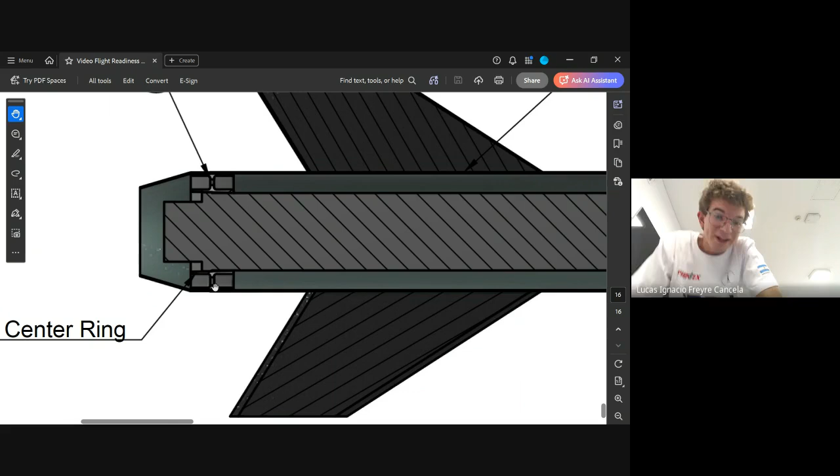Have you flown a motor like this before? No, we haven't. Okay, so be careful. Yeah, it's a powerful motor. Thank you so much for your advice, Brett. Yeah, and the other thing I'll tell you is, no matter what you think you did, sometimes these motors surprise you. So be really careful and conservative. Great. Yeah, we try to be as conservative as possible in design, but these considerations are good to be implemented now. So Walter, sorry, you were saying?

Yeah, just one more recommendation. In the actual configuration, where the rocket nozzle is inside the boat tail, you have an aerodynamic vacuum effect, and I recommend that the nozzle of the rocket motor go outside half an inch to prevent that aerodynamic effect. Because you have a vacuum effect that you need to... sorry if my English is not the best one, but I recommend it. Okay, we understand. Yeah, so I second what Walter said. The vacuum effect I really worry about, and you should have the nozzle flush or protruding, not recessed. Right. Yeah. Okay, great.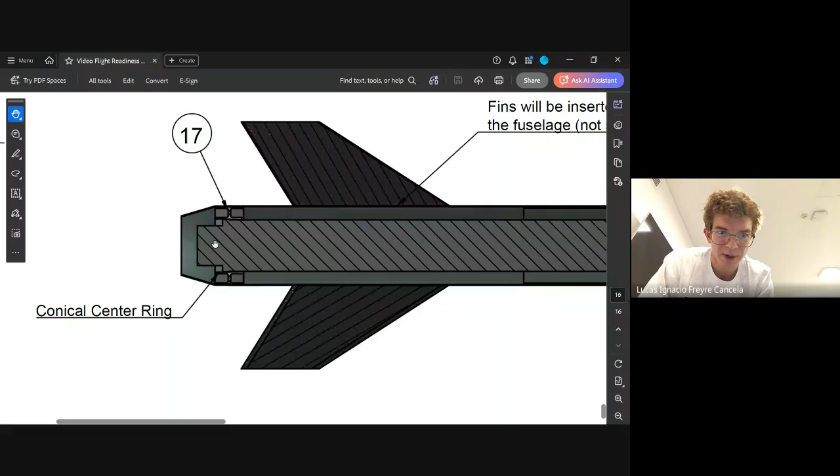So do you have any more comments about the motor retention? No, that's great. So we'll move on to the fins. Okay, so should I start? Okay, so I was in charge with Tomas of the dimensioning of the fins. Our main challenge was to estimate the in-plane torsional rigidity G of the carbon composite. Due to our lack of testing machinery and resources in materials, our strategy with the design approach was to rely on theory and estimations of lamination, primarily using classical lamination theory developed by Jones, to build some scripts, mainly in Python, to find the optimal geometry of lamination. I'm talking about ply orientation, ply sequencing, and we try to use the best of both worlds when laminating.

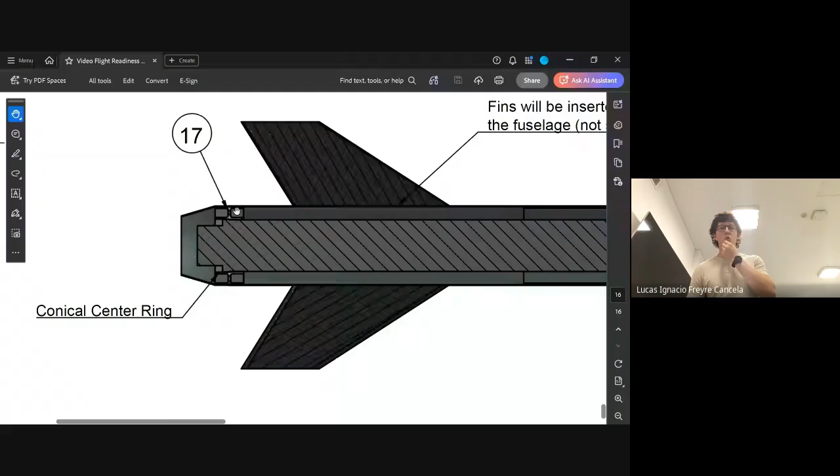Our thickness that was considered optimal for achieving the safety factor of the competition, that was 1.5, was achieved using an 8mm laminate, that has a flutter velocity of 1,430 meters per second. That in our criteria gives a good range of operation for our fins. One consideration that we tried to cover also was the tip-to-tip reinforcement that will be applied after we mount the fins. That aspect was modeled thinking that the fin already had the thickness provided without the reinforcement. So our expectation is that the final flutter velocity while flying will be higher due to the damping of the final structure of the rocket. So that's all I have to expose.

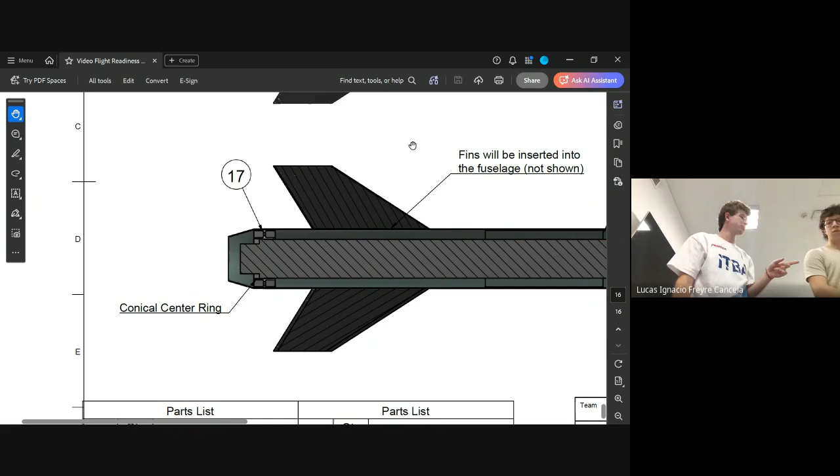Great. So some general properties of the fins. It will feature a 300 millimeter root chord and 1.1 caliber due to previous suggestions on iterations. This would ensure that our fins don't lose their stability during supersonic speeds and provide enough root chord to keep them attached to the airframe at all times. As mentioned in the drawing, the fins will be inserted into the fuselage through the jigs that we showed previously, these aluminum mounting devices that Felipe is showing in the other camera. The jigs will be glued to the airframe, and then holes will be made to that size on the airframe to attach the fins. This will provide higher rigidity than just gluing them to the surface.

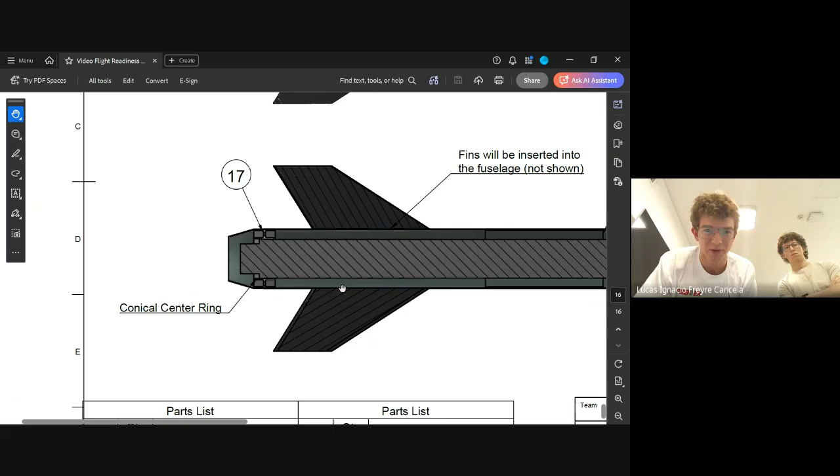How many of them are there? We have 3 per fin. And we estimated through calculations that that's almost the same as fixing the entire root chord, but allows us to gain approximately 800 feet of height due to mass reduction. Where will the screws be located in that bracket? No, it's glued to the airframe.

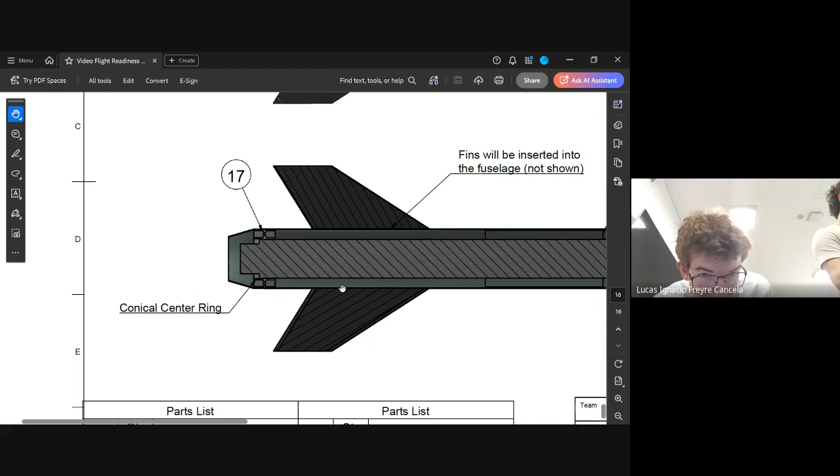And we put those glued joints according to the testing we did of lap shear joints. Will you have internal fillets? Yes, we will have internal fillets for the jigs. The jigs also will be glued with carbon fiber to the airframe, and we will also have a tip-to-tip on the outer side. Also, the radius at the outer side between the fins and the airframe. And well, that would be it. We would be using 5 layers of carbon fiber for the tip-to-tip.

What is the diameter of the fillet inside and outside? Diameter of the fillet inside and outside, it's around 15 millimeters. It's what we're thinking of doing, just to provide rigidity in the union. Have you used this technique before on any other rockets? Which one? These brackets and the internal fillets.

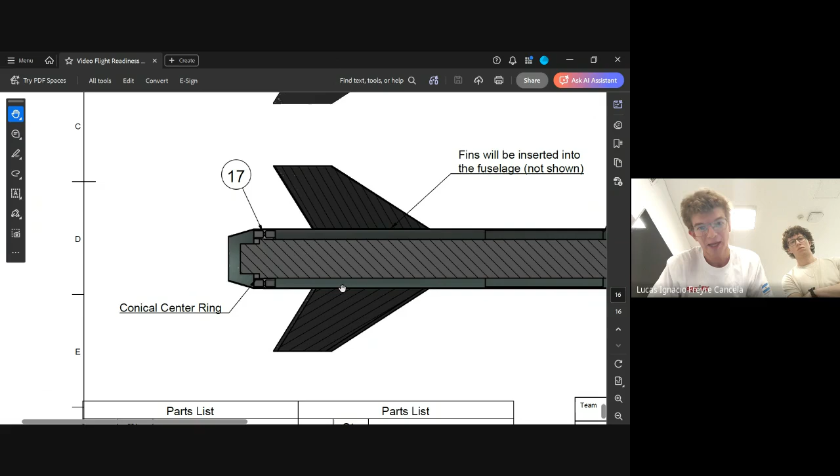Until now, we've used the gluing of the fins directly to the rocket and then do a tip-to-tip. What we think of this technique is that it should provide at least the same bonding capabilities of the glue joint, and improve them based on the fact that they will be joined to a more rigid structure. So they should at least perform as the previous fixing method. Okay, so you've not used it before. No. Since we don't have the ability to fly in Argentina with big motors, we're testing it now.

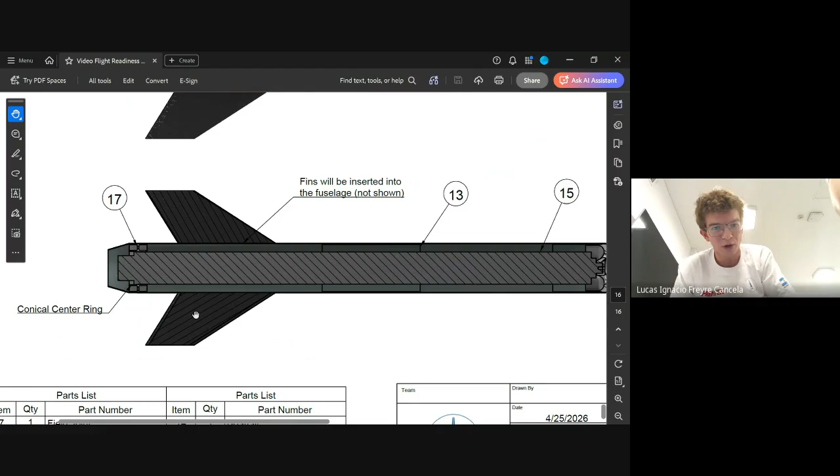So are you going to glue the brackets to the airframe first, then the fins in? What assembly sequence will you use? First, we will do the holes on the fin can with jig slots, with 3D printed jigs that align the slots with the actual direction of the rocket. Then we'll glue these jigs to the slots we make, and then we'll fix the joints with carbon fiber to the inner side of the rocket.

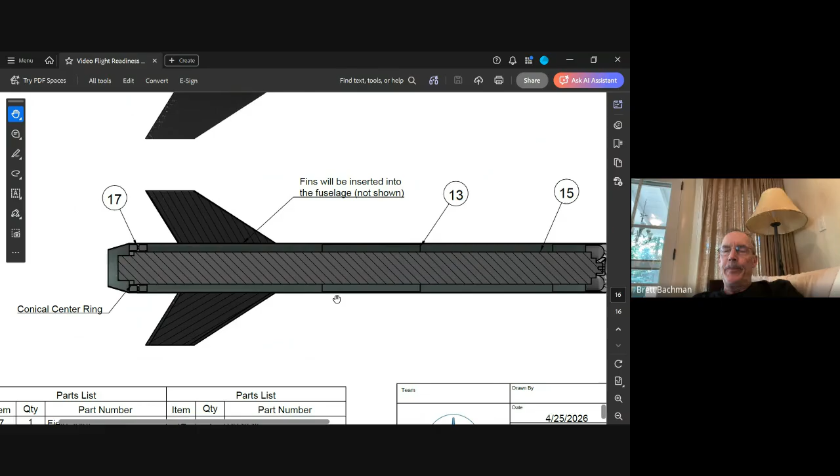One for bonding the jigs, because we already have the 3D printed devices to make the holes, and 1 day for doing the slots and to glue the joints, and another day which is planned to let that glue dry, and then to stick the fins into the jigs and to make the epoxy bonds. What kind of epoxy do you use, and what's your cure time? We use epoxy EA 120 HP from Loctite, and our curing time is 1 day approximately.

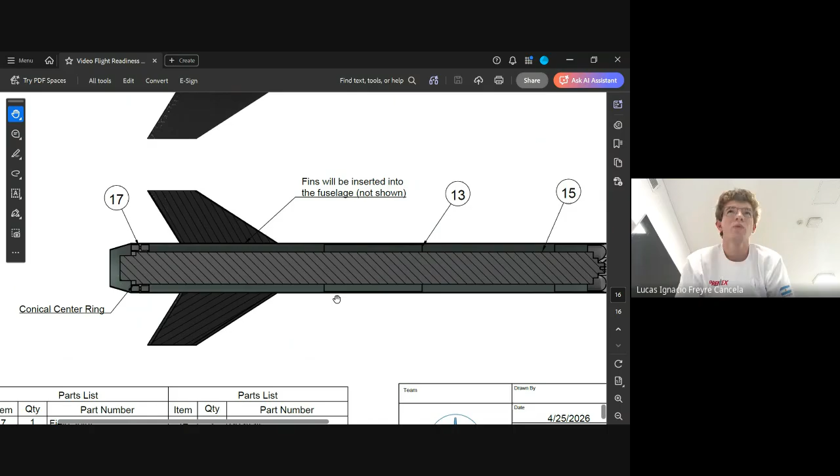Yeah, so if you're going to do fillets that require 1 day to cure, it's going to take you 4 days to put the fillets on the outside and inside, right? Why? Well, maybe you do it differently, but I was just saying that normally if I have a fillet epoxy laid out, if you turn the rocket 180 degrees, the epoxy will drip down. So you have to wait for it to cure. I'm sure you know how to do this.

We're planning not on doing it horizontally, but doing it vertically, so it drips in one direction instead of to the sides. So we would be able to glue all of the fins the same day. Not do it 1 day at a time. So the radius of the fillet, you said 15 centimeters, or is it 7.5? What I mean by radius is if this is the fin, what's the radius of the circle that you would draw between the fin and the airframe?

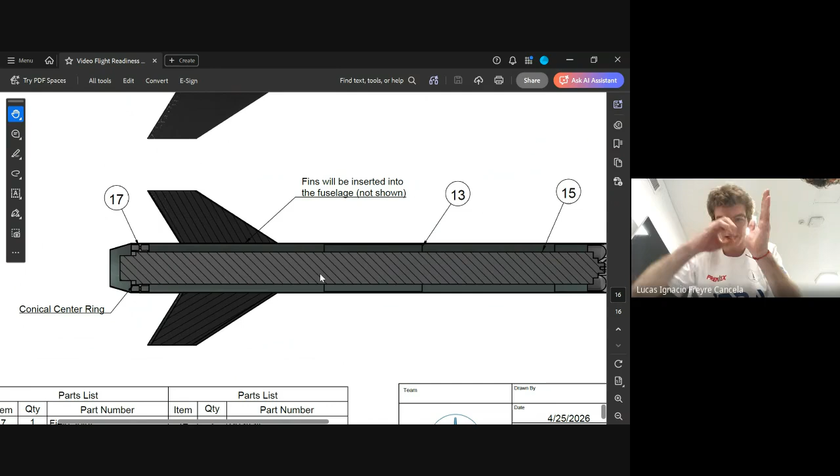You mean if these are the two fins, what would be the diameter of the fillet? The epoxy is laying in kind of a circular shape. What's the radius of that circle? Walter asked this earlier. I thought you said 15 centimeters. You mean the radius or the diameter? Either one. Oh, okay. Let me check. No, the diameter is 15 millimeters, not centimeters. Right? Yeah. That's very different. That's a little more than half an inch.

Sorry, did I say centimeters previously? Yeah, you did. Sorry. So how are you going to get that much epoxy to stay in the joint if you hold it vertical? It doesn't seem logical to me. We have another epoxy that we are going to use for the fillets that has aluminum powder, so it's more rigid, it stays in position, it's higher in density.

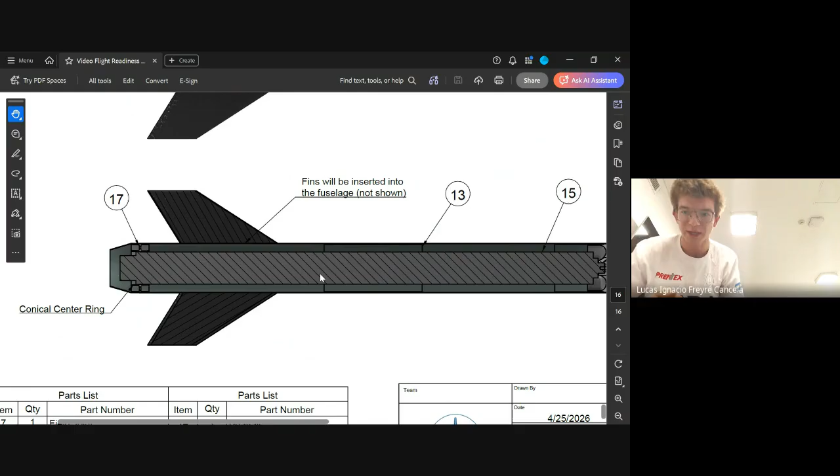It's not the usual epoxy glue. It has some added substrates that make it more rigid. It's not like a liquid, but rather something more plastic. Like peanut butter. Yeah, exactly. It has that kind of consistency, and that's what we're using for the fillets. Sorry if I wasn't clear on that.

So you're going to glue them vertically and let the epoxy drip down, and then you're going to apply fillets with a very thick paste filler, and you're going to keep it vertical, not horizontal? Yes, that's the plan. I've never done that before. I've never seen fins put on vertically and filleted. We'll send you the video.

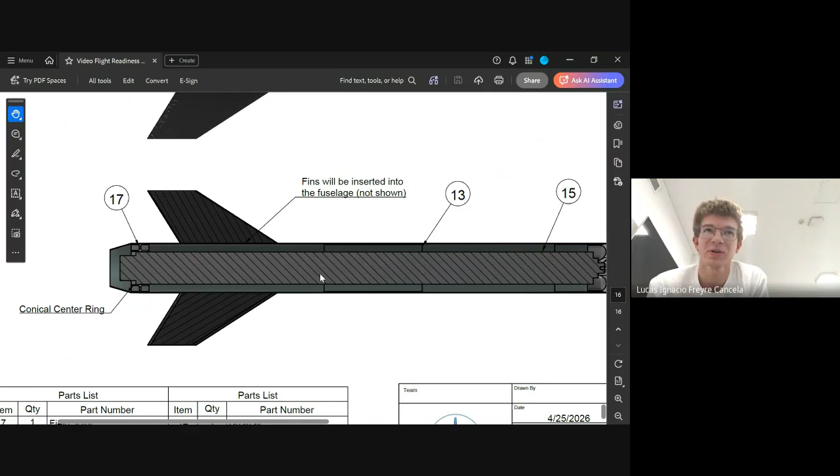Yeah, I trust you, but with the epoxies and fillers that I use, it's not possible to do that reliably. I think this epoxy bond is special from Argentina. It's called Airpox because it has this aluminum powder. Okay. But we've done it last year like this, so I can assure you that this works. Sweet. All right.

I recommend that you take enough time to attach the fins to your rocket to prevent that kind of case in your flight. What do you think happened in that case? The tip-to-tip and the assembly of the fins to the airframe is not the best one. Okay. And with the velocity that motor gives the rocket, it just takes out the fins.